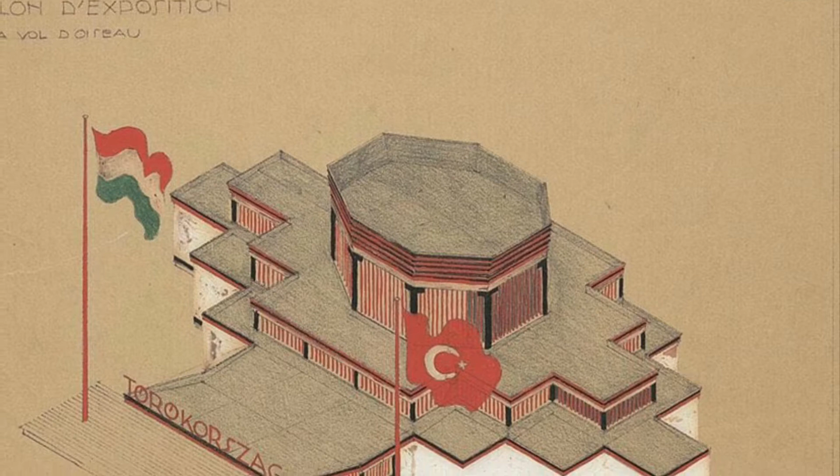Sedad, born in an upper-class family, spent most of his childhood in Europe and spoke French, German, and later on Turkish as well. He studied under many great architects and even interacted with Le Corbusier. Eldem's architectural practice began after the construction of his Turkish pavilion project for the Budapest Fair in 1931 and his academic life in 1932 when he was appointed to the Academy as a professor.

Till his passing in 1988, Eldem constructed numerous buildings and was successful in his role at the Academy, making him one of the most pronounced architects and complicated figures in Turkey. The Sosyal Sigortalar Kurumu, commonly known as SSK, is one of his most significant works as well as one of the key modern buildings in Turkey.

The most admired characteristic of this complex is how it is harmonically integrated into its historical context, which was once an urban fabric consisting of vernacular Turkish houses, but has changed significantly to its present condition. In addition, Eldem not only dealt with the morphological features of individual buildings with a full contextual attitude, but also designed the general layout to fit the silhouette of the street.

However, like every contextualist structure, the SSK complex moved away from its starting point when the construction was completed due to the fact that the context had already changed, which many are not aware of actually. The main idea lies in the principle of realizing the building complex in harmony with the environment in which it is located, reflected in Turkey in the 1950s and 60s, which led to a critical evaluation of the different views on the revised international style of the new regionalism at a time of discussion.

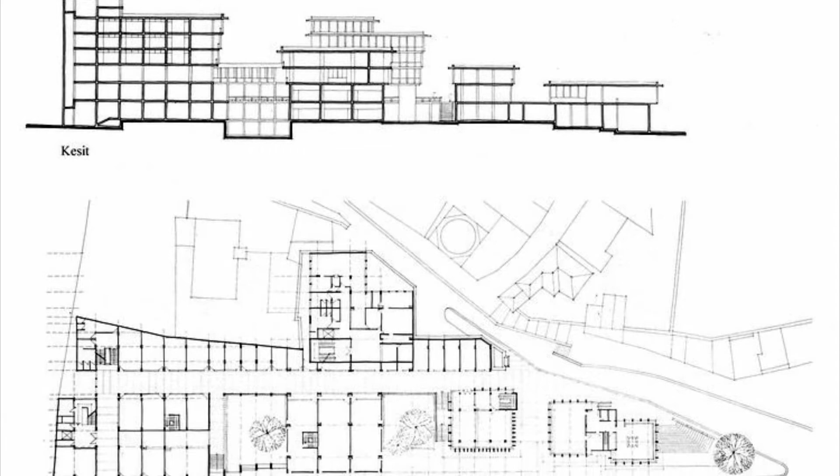In this period, it is very important to emphasize the peculiar setup and features of the Social Insurance Institution building where contextualism was adopted in design. It is because Eldem knew how to adapt his style to large-scale differential functional structures that allowed him to come up with a formula. Common features of this include symmetrical, monumental forms, facade protrusions, and the use of traditional Turkish window proportions. In specific, these features are relevant to the SSK complex as it adapts to these features and forms a modern understanding of an inherently traditional context.

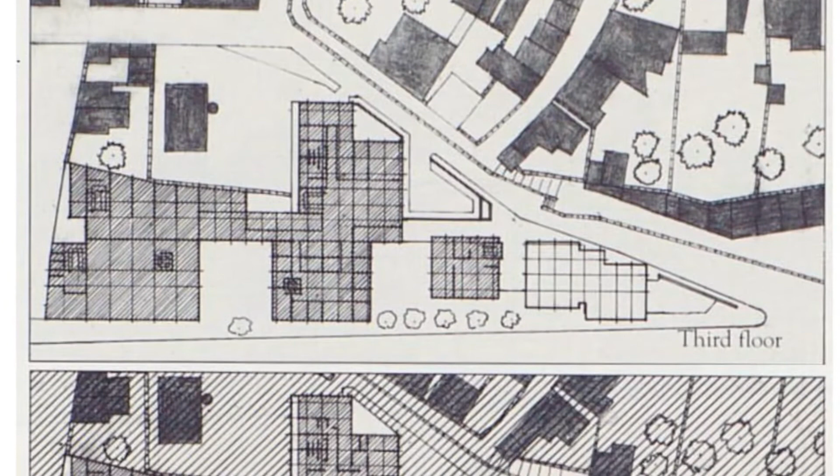One of the more obvious features is the roof and the long eaves on the mostly flat roof and the long rectangular profile windows referencing the old timber houses. The cantilevered extended floors with a modern basis are a nod to Eldem's particular understanding of vernacular Turkish architecture and its inherently modern plan. The modular approach that was intrinsic to Eldem's style can be seen in the plan of the SSK complex. These all together establish it as Turkish second national style.

Involving the fundamentals of the international style, Eldem built a large structure that is separating in small fragments with multiple functions, dubbed as the small multi-part approach. The idea of the architecture was to be more conscious of the surrounding traditional Turkish neighborhood and establish a base that is not damaging the aesthetic nor the topography.

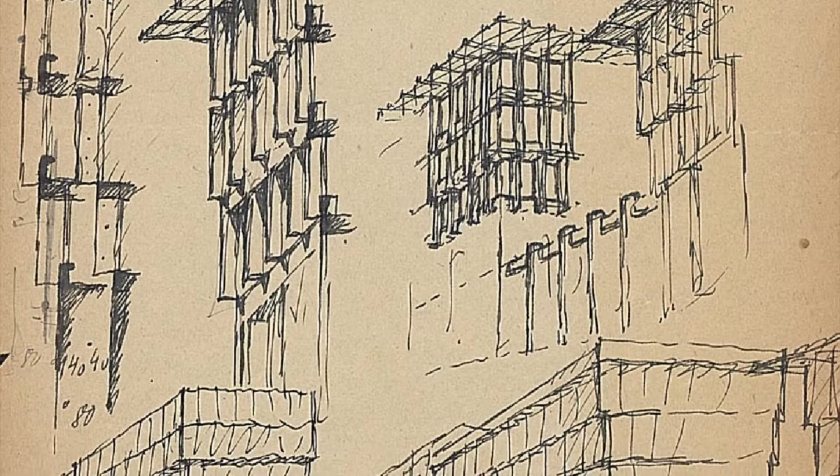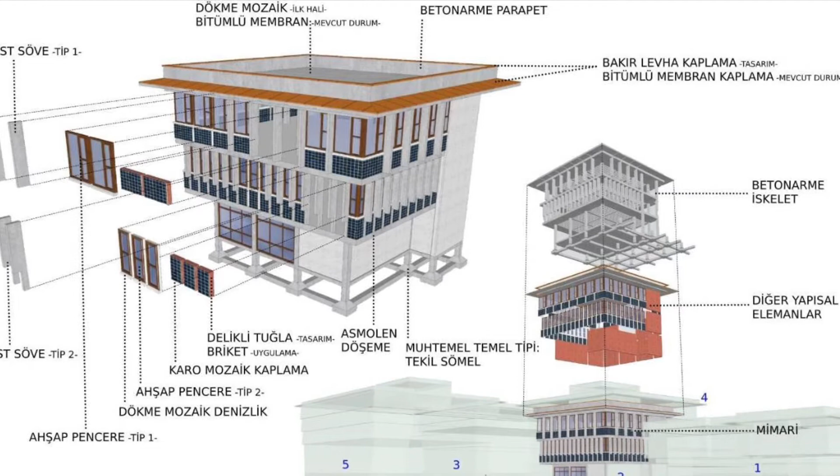Eldem's choice for the majority of the structure was to be reinforced concrete, which is one of the international style's essential materials. The majority of the exterior has been decorated with cladding and louver systems that, however, goes against the international style because it doesn't have a plain surface, and these are ceramic tiles, mosaic tiles, stone tiles, parapets, and vertical louvers. Later inclusion of bitumen was effectuated.

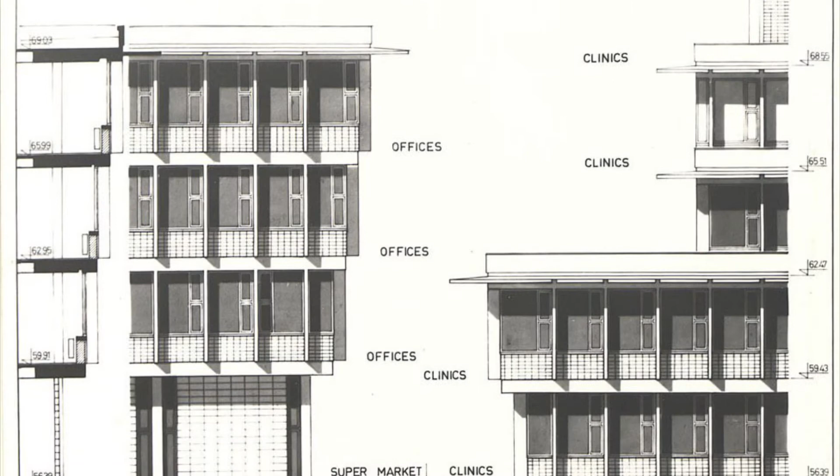Being divided to fragments, the building includes many doors and windows. These components have been encircled with wooden frames and come in different dimensions. The ground floor follows a curtain wall system. The first floor's front elevation has no windows, but from the sides it has a few. And from the second floor onwards, there are plenty of windows which are spaced with vertical louvers.

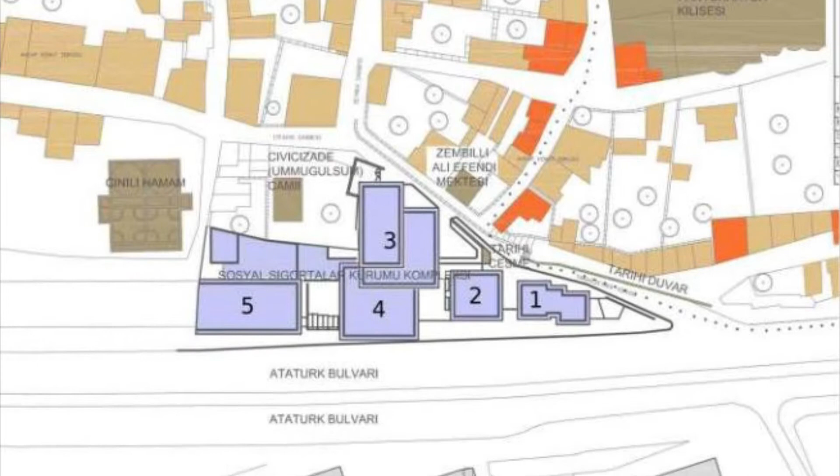The complex is divided into 5 areas. Each originally had a function before it was changed to 2, which are Cibali SGK and Unkapanı SGK. Their functions were 1. coffee house, 2. bank and dining hall, 3 and 4. dispensary, and 5. office. The street of Zeyrek is sloped, which leads to unlevel floors. To counter this, Eldem cut out the ground below and made the floor flat.

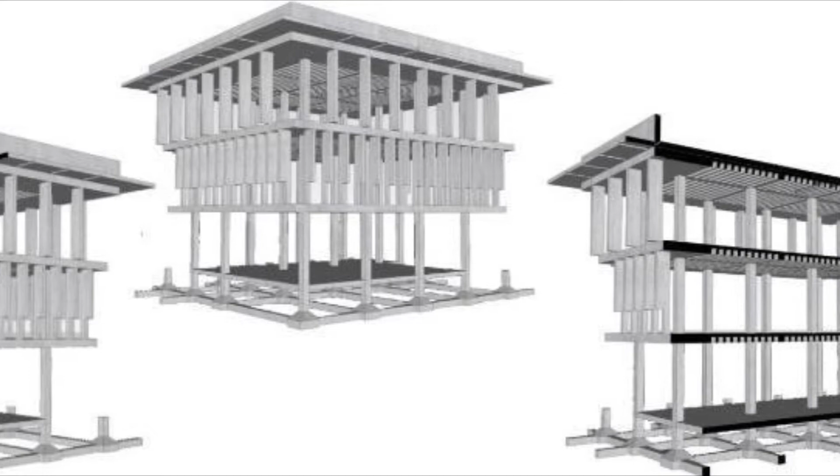In terms of foundation and load-carrying method, Eldem used shallow footing with a concrete slab holding the complex. For central load, he used reinforced concrete columns throughout the inside to hold the structure. The footings of the foundation extend from the concrete slab and predominantly make another horizontal surface from flat columns that connect from one footing to the other.

Furthermore, the layout of the complex seems inconvenient because if you were to go directly behind the buildings, you'd have to go around the entire complex. However, at the start of the complex, from the coffee house, there are stairs that equalize the slope for the people to walk, which also provides a ramp for disabled people. Eldem makes sure nothing is overlooked and rather complements them.

The staircase he had implemented is located on the entirely opposite end from the entrance. What seems to be a dysfunctional and tiring design is actually one that satisfies both form and function. It successfully serves not only the users and design of the building, but also deems it to be functional for those around it. This makes the bottom of the steep slope that it is located upon seem even more balanced and well-fitted.

Every 3 years, the Aga Khan Award is given to progressive and historically appreciative architecture. The SSK complex earned this award in 1986, as its designs perfectly fit such standards and more. The office complex embraced the modern development that Turkey was striving for during the modern movement that has succeeded in presenting itself and creating a new form of Turkish architecture.

Sedad Eldem was rightfully rewarded as this architectural complex satisfied the idea of progression to create and inspire others to pursue such modernistic designs. He used to incorporate the plans of old Turkish houses in his designs, adding to it his own modern twist. This allowed for the evolution of one of his latest and significant works to successfully achieve such an equilibrium in a traditional region. His design is one that was also able to boldly insert itself in such a space while respecting historic landmarks nearby. Of these landmarks lies a historically built mosque along with long-lived homes of citizens.